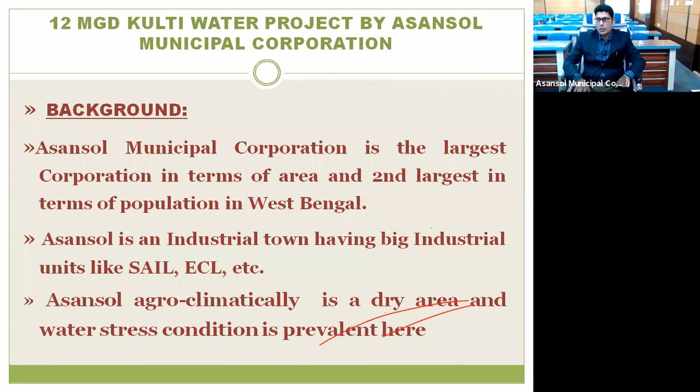From an operational point of view, this project was divided into three components: the pre-takeoff stage, then the takeoff stage, and completion of the project and outcomes. Now, when we start with the preparation for the takeoff stage, this was the most challenging phase for execution of this project. The major challenges which I want to share, first, the legacy issue.

This project was conceived twice before, in 2009 and in 2011, but it couldn't take off. In fact, procurement processes were done, funds were allotted. Because of the poor planning, the project could not take off. So that was a legacy issue. There were apprehensions in the mind whether we will be able to take up this project or not.

Then this area is a very congested area. We have the presence of Eastern Coalfields Limited, Damodar Valley Corporation, Steel Authority of India Limited there. The National Highway traverses that area. So getting the NOCs from all these authorities was also a big challenge.

Also, seasonality is a very important factor in such type of water projects, because when to start the riverbed works and when to start the downstream works was a big challenge. So these were the major challenges which we identified initially before executing the project.

Now, interventions done before the execution of this project. We made the charter of activities. Every activity was clearly defined with defined timelines. All the components of this project were divided, and each component was deliberated. Brainstorming sessions were done so that we can identify works which can be clubbed together, works which are consequential of each other, and works which are standalone, so that we can complete this project on time. Thankfully, we did it, and we did it before time.

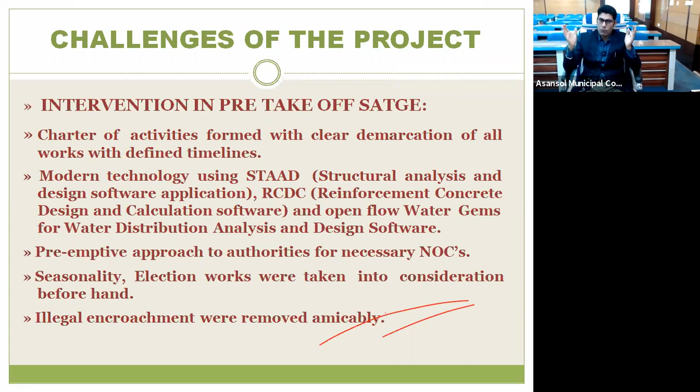Also, there were certain areas where we had to build overhead reservoirs and ground level reservoirs, where there was unauthorized encroachment. So beforehand, we had discussions with all the stakeholders there. We brought public confidence that this project is for them, and amicably we settled most of the issues beforehand. Now, before going to the takeoff stage, I want to share the components associated with this project.

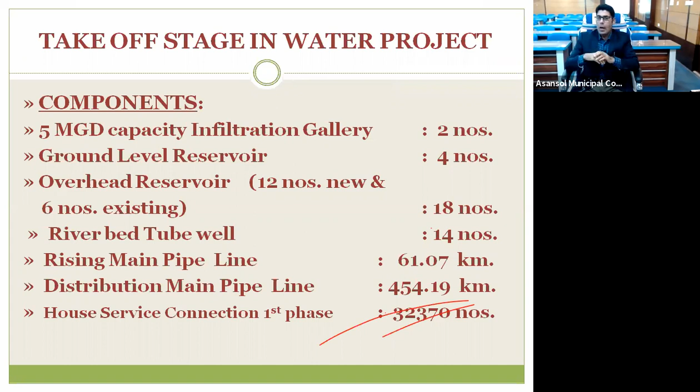We are having 2 infiltration galleries in this project. This was the most challenging task for all of us because these infiltration galleries have been constructed beneath the river channel of Damodar. It's a very fast flowing river. So we have to also consider the seasonality, the rainfall pattern, and also we have to divert some water channel so that these infiltration galleries can be completed in time.

We have 4 ground level reservoirs. We are having 18 number of overhead reservoirs. Here I want to put one point that our command area is based on the presence of overhead reservoirs, OHRs. So how much population, how many people will get benefited out of the OHR, that has been clearly delineated. In fact, we have put a projection population of 2030. What will be the population in 2030, 2048? They will get benefited of this project without any further intervention.

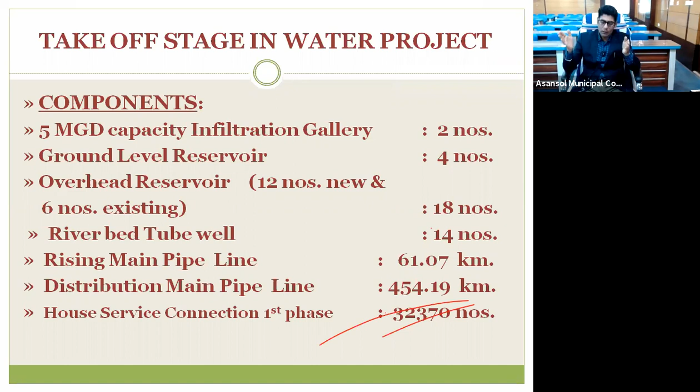We have laid the pipeline of around 454 kilometers. We laid the rising main pipeline of around 61.07 kilometers. This was also a very challenging task because we have to cut the roads, we have to operate during the evening time, we have to operate sometimes during the night for executing and laying down these pipelines. Next.

Now, during the takeoff stage, we completed all the tendering formalities, issued work orders before time. My approach and my team's approach was to go in the field. Component wise, we used to take the review. More than 200 to 250 meetings were done in the field so that all these works in a panoramic way are connected together so that at the end of the day, we just cut unnecessary time delays. And finally, I think that was the most critical factor in executing this project.

We had to also give household connections. So beforehand, we organized camps where people used to come, file their application, documents for getting the water connections. So we didn't wait for the completion of the project. We started it beforehand so that we can have a database. We also decided in the Board of Councillors meeting that for schools, for urban primary health centers, for poor people, we will give free connections. And as of now, we have been able to give those connections as well.

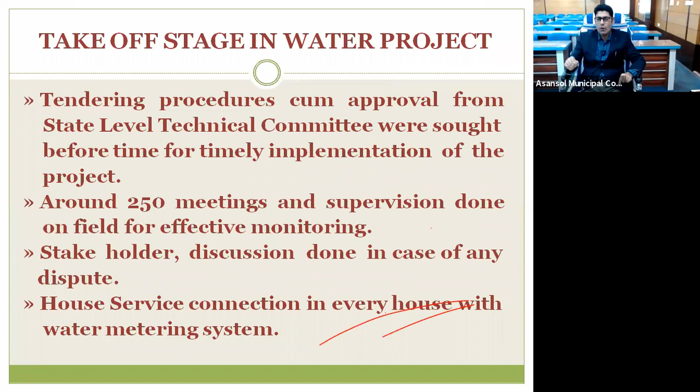Now, outcomes of this project. For me, the most important and critical outcome of this project is to give water to 3 lakh people who were deprived of this basic service. We completed this project before time, in fact, 8 months before what was scheduled in the DPR. In fact, we got an appreciation from the Honorable Chief Minister, Government of West Bengal, who inaugurated this project last year. The design and the software technology which were used for executing this project allowed us to save around 30 to 40% of the time.

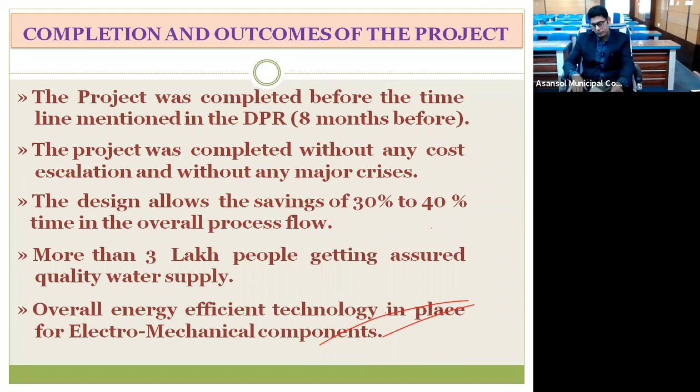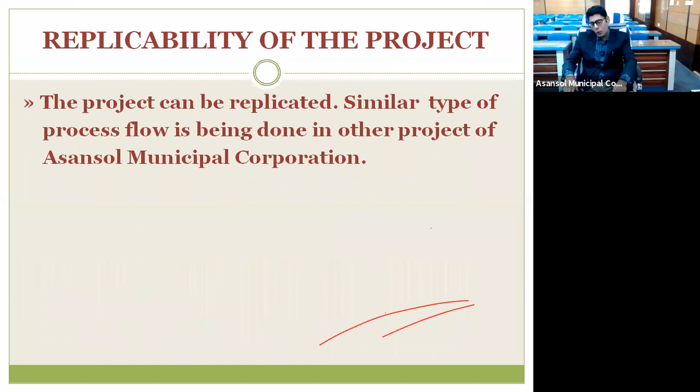We also used energy efficient technology for the electromechanical part. For example, using highly efficient water pumps, using better electromechanical components allowed us to save the electric consumption. This project can be replicated. We are replicating the same project in other wards of Asansol Municipal Corporation, especially Raniganj and Jamuria. They are the added municipalities with the Asansol Municipal Corporation, and that is successfully unfolding. This project was also appreciated by Bentley USA for design of this project.

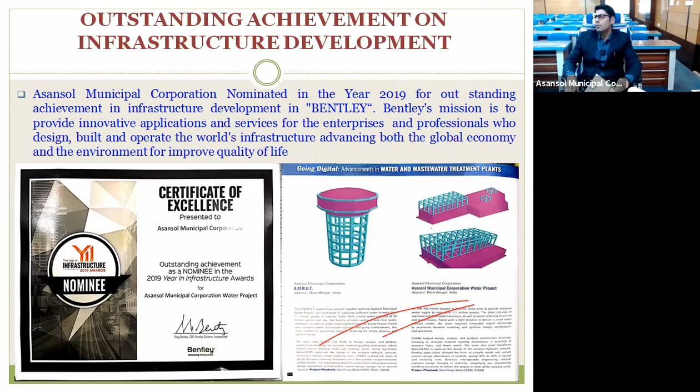I'm sharing some of the snapshots of this project. Also, I would like to share a 1-minute video of this project. This is my presentation. Thanks a lot for giving me this opportunity.

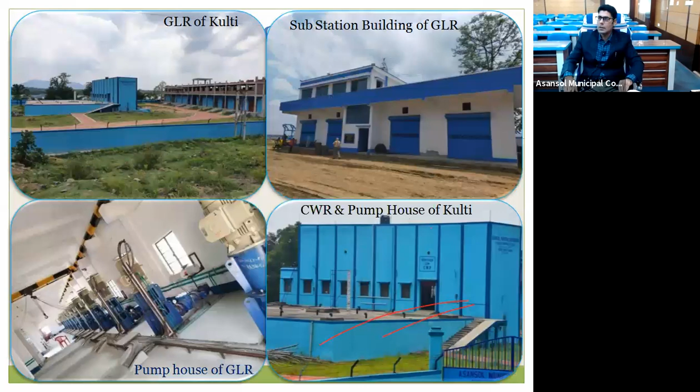Sir, can we move on to the questions first, because we have only 15 minutes per presenter, right? So in the last, if the time allows, we can just play the video again. Yeah, okay. I want to share. That's a 1-minute video. I can share that video after the question and answer session. Yeah. Right. Thank you, sir. So moving on to the judges.

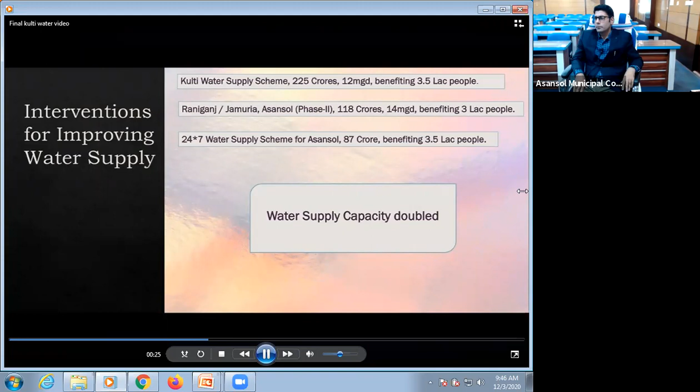So we have to share the audio also. It's not coming through. So you can do one thing, you can just mail the video to us and I'll just play it from my end at the end of the session. Right sir, thank you so much. So we can move on to the next presentation, sir.

You have 3 presentations today, right? Right sir. Sir, should I start? Yeah. Sir, my second presentation is on CCMS based lighting management system, sir.